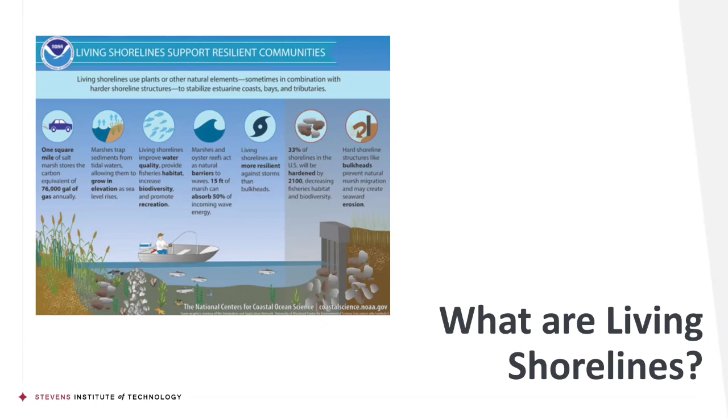So we're trying to take a more broad approach to what living shorelines are. There are a number of other names for living shorelines. You may have heard some of these: eco shorelines, green shorelines, ecologically enhanced, natural and nature-based features. Natural and nature-based features is a term that the Corps of Engineers uses quite a lot now in the United States, so we adopt that and utilize it along with living shoreline. Generally they're all referring to something that has a similar function.

In New Jersey, there is a regulatory definition of a living shoreline. The state defines it as a shoreline management practice that addresses the loss of vegetated shorelines, beaches, and habitat in the littoral zone by providing for the protection, restoration, or enhancement of these habitats. So the primary function of these projects is to utilize or mimic some sort of natural feature, to provide protection or stabilization to shorelines which are eroding.

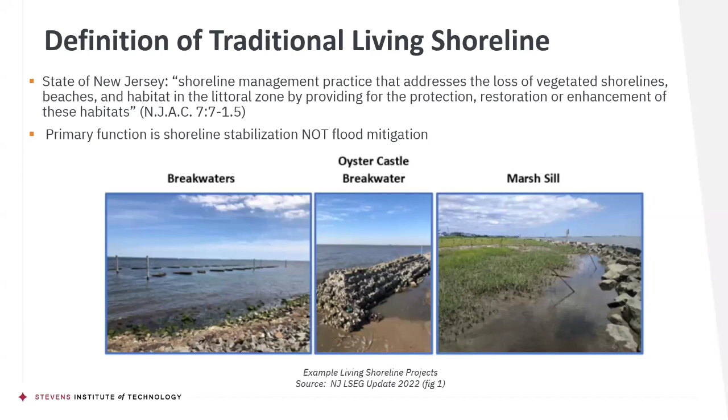And they can be eroding for a variety of reasons. It could be from natural processes like wind-generated waves during coastal storms, but certainly in areas as developed as New York and New Jersey, it could also be eroding from things such as boat wakes, recreational vessels, ferries, even barges that you see up and down the Hudson River. So wherever we have these forces which are creating erosion, one of the techniques we can use to try to stabilize that shoreline is a living shoreline.

We take a very broad definition or approach to what a living shoreline is. We've done at least a little bit of work, but there's still a lot more to be done along the lines of living shorelines on developed coasts. Developed coasts are different from open, natural, pristine coasts in that you're typically space constrained, with development on the landward side abutting up against a water body, which in many cases is used for navigation and commerce in addition to providing habitat. So you have a limited footprint in which you're allowed to work, which restricts the types of approaches you can utilize.

The philosophy we take is that even though you're constrained in the types of approaches you can take, it doesn't mean you can't do the things that serve the man-made function, as well as try to provide or restore some natural function to the shoreline.

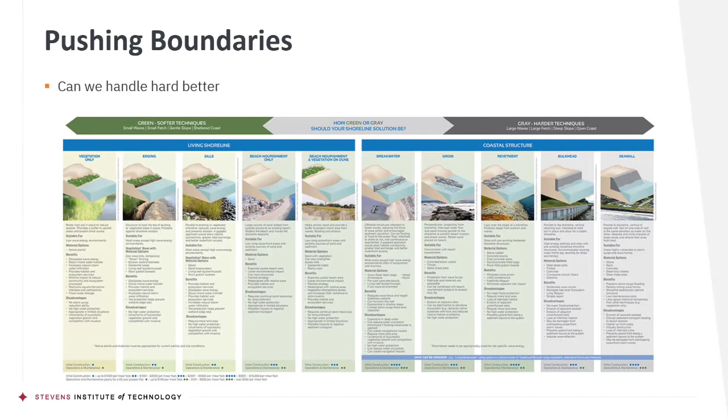What we talk a lot about is how we can push the boundaries and do some of the hard stuff better. As you get to the right-hand side of this chart, are there opportunities to introduce elements which can create more ecological benefit to these traditional hard structures? That's kind of what living shorelines are and how we define them.

We want to walk through some of the history of living shorelines, and this is the Jersey edition, so we're focusing primarily on what's happened in New Jersey. The timeline we're going to cover includes some initial projects, the guidance we've developed, which we'll spend most of our time on, some recently constructed projects, and then the future, leaving time for questions.

In New Jersey, the key early project was the Delaware Estuary Living Shorelines Initiative, a partnership between the Partnership for the Delaware Estuary and Rutgers, where they tried to stabilize the shoreline along the Maurice River in Delaware Bay, on the Delaware Bay shore of the state of New Jersey, on the far southwest side of the state.

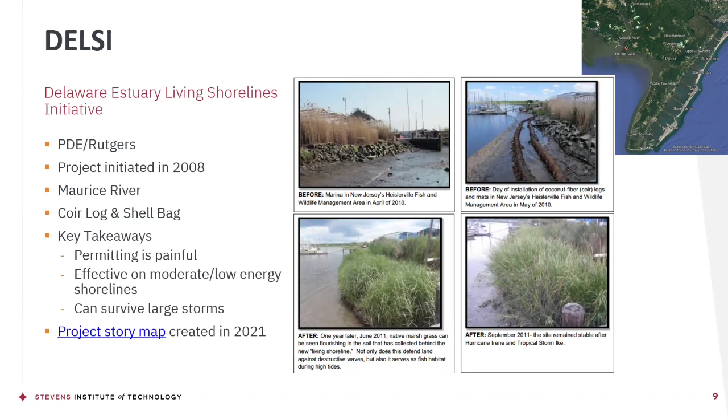This project was really a proof of concept, illustrating how the technique could work in certain environments, but also how difficult it was to permit these projects. The state recognized they spent more money permitting the project than actually constructing it, and started a pathway to make such projects easier to build, recognizing the benefits.

The state did a couple of things. They wrote a white paper in 2009 about living shorelines, which at the time weren't used in New Jersey, though other states like Alabama, Maryland, Virginia, and North Carolina had been using them for quite some time. So the question was, what are these living shoreline things, and could we do them in New Jersey?

They followed that up with a regulatory rule writing workshop in 2010, aimed at providing a regulatory pathway to expedite implementation of these projects. I participated in that workshop, where they brought in experts from around the region to discuss how states successful with living shorelines projects were regulating or permitting them, and tried to roll all that into a rule the state of New Jersey could utilize.

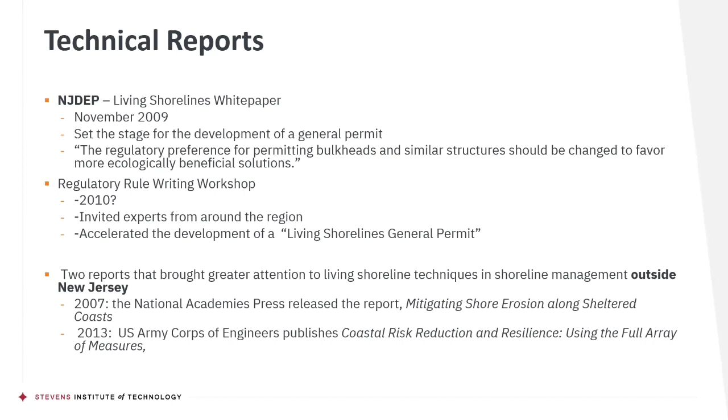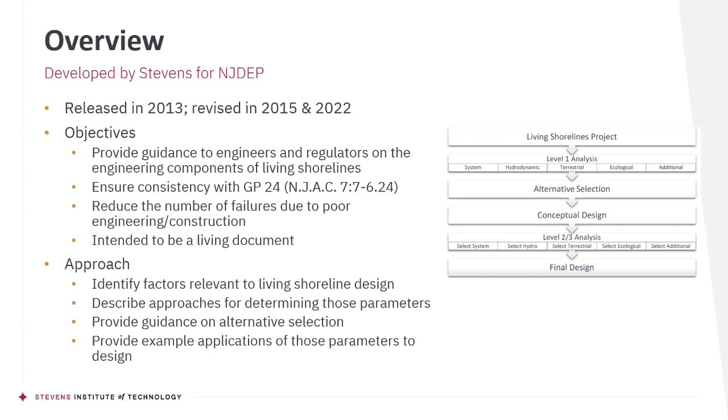The approach we've taken in our most recent revisions is to mimic a document the Corps of Engineers developed called the International Guidelines on Natural and Nature-Based Features. This is a synthesis of experts from around the world getting together and writing, in typical Corps of Engineers fashion, a 1,000-page document about living shorelines, which is very clear and easy to read. We extracted the most relevant things for the state of New Jersey, including this design process, illustrated by this wheel here.

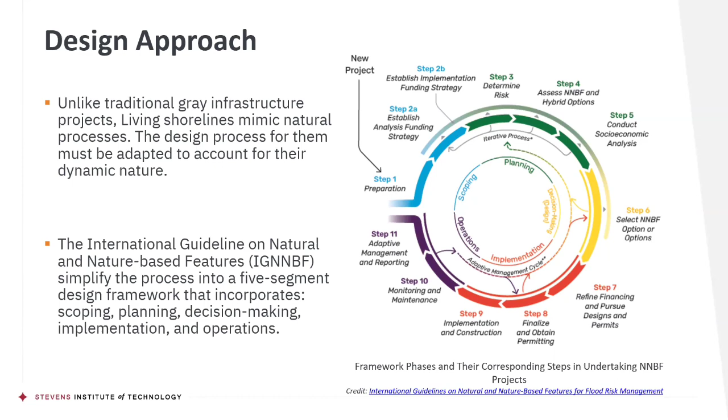It talks about different phases of design: a scoping phase, a planning phase, an implementation phase, and an operations phase, with the level of analysis required at each phase increasing as you walk through.

The scoping phase, as we define it in our guidelines, is a very base level information collecting phase where you're not doing too much work, but trying to obtain information about the site you're working on that will allow you to begin making high level decisions about things you might want to do at a site.

There's a number of tools that have been developed since living shorelines became popularized in the state. Some of them are in this wheel: the Restoration Explorer, the Watch tool. These are things you can implement or apply—many available online—that provide a base level of information about a site, which you can then use to design your project.

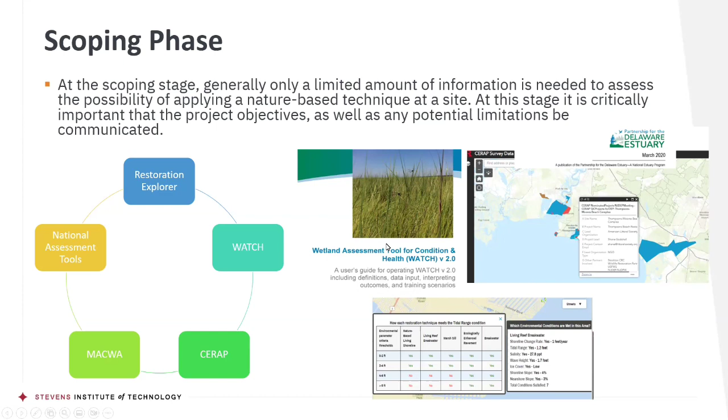The next phase up from scoping is called the planning phase. We envision this as the phase of design where you're continuing to collect information about your site, but now getting more detail, doing a higher level of analysis, providing enough information to create conceptual designs sufficient to approach the state and begin the permitting process for your project.

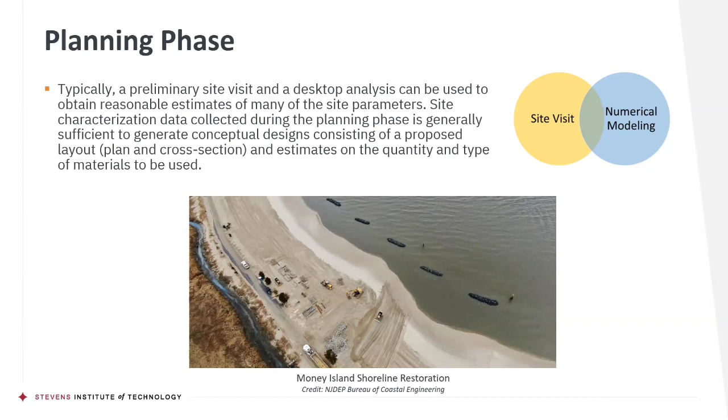Typically, planning phase data collection and design is a desktop type analysis. At this point, it's not necessary to collect field data or do in-depth numerical modeling. It's really about desktop analyses and site visits to get some basic information.

One of the heavy things the document talks about is site characteristics—how we obtain information about our site and then begin to utilize this information to design. We split the characteristics of a site into four categories: ecological, system, hydrodynamic, and terrestrial. We talk about different parameters under each heading relevant to the design of a living shoreline project, how to obtain information about them, and what the levels of analysis refer to.

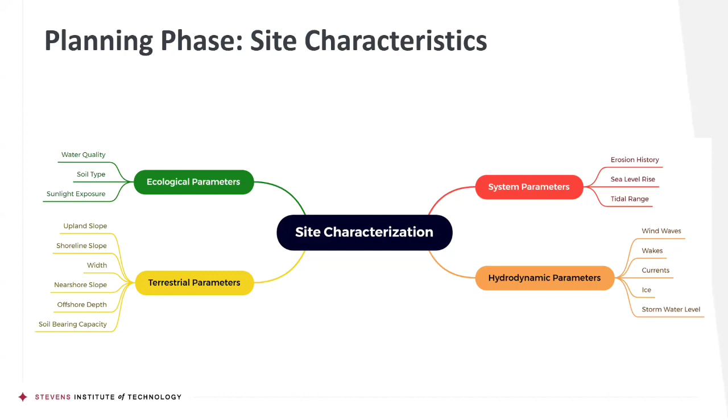So what do you need to collect about erosion history at the scoping level? What do you need to collect at the planning level? And what do you need to collect at the implementation phase, which is the next highest phase?

As part of our document, we were asked to provide guidance on what types of projects might be appropriate in different environments. So we collected information about originally five different types of projects, but now in our new guidance, only three: a marsh sill, a breakwater, and a living reef.

For each of those site characteristics you see on the left-hand side of our table, we talk about the types of conditions under which each of the three different living shoreline project types are appropriate.

We provide a qualitative estimate on the left table, and then on the right, we have quantitative numbers. You may wonder why we didn't just combine the two together, because we could have.

The reason we didn't provide numbers in our table originally was because everything within this table isn't necessarily black and white or hard cutoffs—there's a lot of gray area with these parameters. So to emphasize that, we split out the qualitative and quantitative, forcing somebody to think as they went back and forth between the two tables, and hopefully recognize that if your erosion was slightly above one threshold versus another, you could probably apply more than one project type.

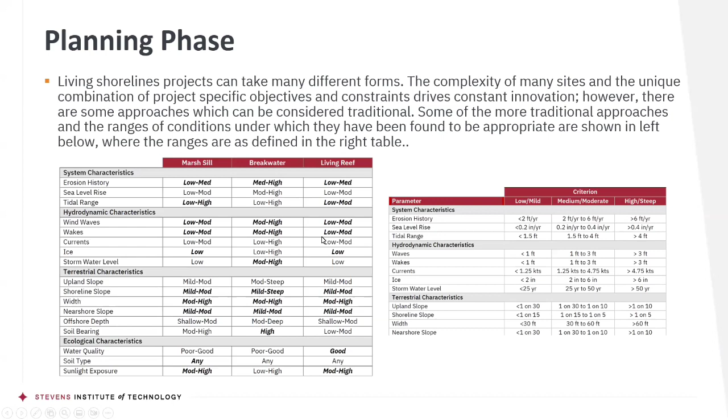Finally, the implementation phase is really the level of analysis when you begin to take your conceptual designs and turn them into what I'll call real engineering scale workable designs. So this is the fine tuning that you would do in your analysis.

At the implementation phase, it's not recommended that you go back to, if we're counting, there's 17 different parameters that we talk about. It's not recommended necessarily that you go to a higher level of analysis for all 17 of those parameters. But if you reference back to the table on the previous slide, those bold and italicized parameters are the ones that are most relevant for specific project types. Those are the ones you would dig in on and do a higher level of analysis.

And that higher level of analysis could be anything from advanced numerical modeling to field data collection. These are the types of big ticket items that cost a lot of money, cost a lot of time, but it's the type of information that you want to be certain of to ensure that your design is going to perform as you intend.

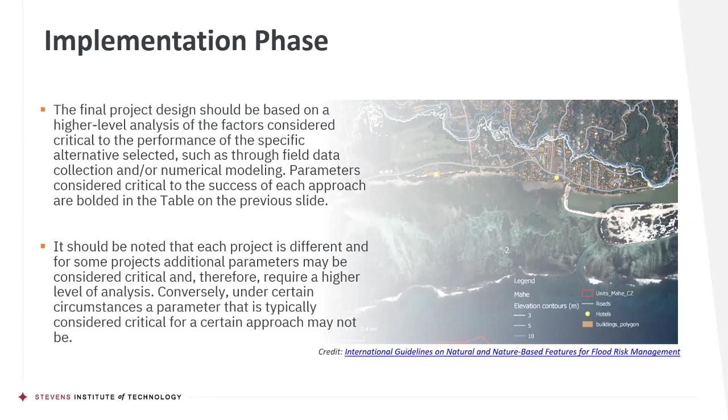So the different categories of parameters, just to go through them: system parameters. System parameters are generally more regional type things, or parameters which, like erosion history, is a parameter which is really not in and of itself a characteristic. It's really a response of the shoreline to other parameters. So because it's this accumulative kind of effect, we call it a system parameter.

And so we have three of them: erosion history, sea level rise, and tidal range. And again, in the Living Shorelines Guidelines document, we go through each of these in detail, and we talk about how we determine information about these parameters and how we apply it to the design of a living shoreline. Some of it's very straightforward for engineers, maybe, but then some of it's a little bit different.

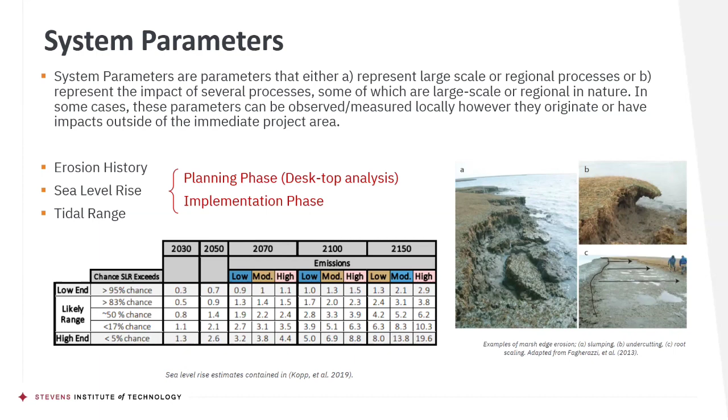So when we talk about things like tidal range, traditionally in engineering we talk about geodetic datums, NAVD 88 and NGVD 29. When we talk about living things, we tend to talk more about local tidal datums, so local mean high water and local mean low water, because these living aspects of the projects, the vegetation and the biota that are using the project, are dramatically affected by small changes in tidal range. So a more regional understanding of tidal range is not necessarily appropriate when you get to the design of living shorelines. We talk about the different interpretations required for living shorelines projects.

For the hydrodynamic parameters, we have five: wind waves, boat wakes, currents, ice, and stormwater level.

A couple of things that are maybe more relevant for these living shorelines: boat wakes, again, in the urban waterways around New York and New Jersey. Boating, recreational and commercial, is a significant source of energy within our waterways. So understanding boat wakes is really important.

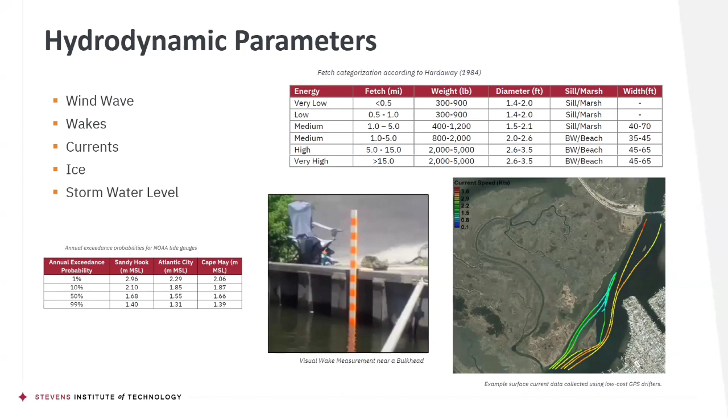Stormwater level is important. Understanding that if we're designing a project to protect a marsh, if the entire marsh is inundated, we may not need to protect it because it's underwater, so the edge won't erode. So it's a little bit of a different, nuanced understanding of how to apply definitions of storms and stormwater levels to the design of living shorelines.

Moving up the scale now, we're moving into terrestrial parameters. Living shorelines have a variety of terrestrial parameters. Slope is really important for living shorelines.

And then things like soil bearing capacity. Most of the locations where we're building living shorelines, at least in the more pristine environments, the soil sediment is very loose, so we have to worry about projects - things made out of rocks and other structures - sinking.

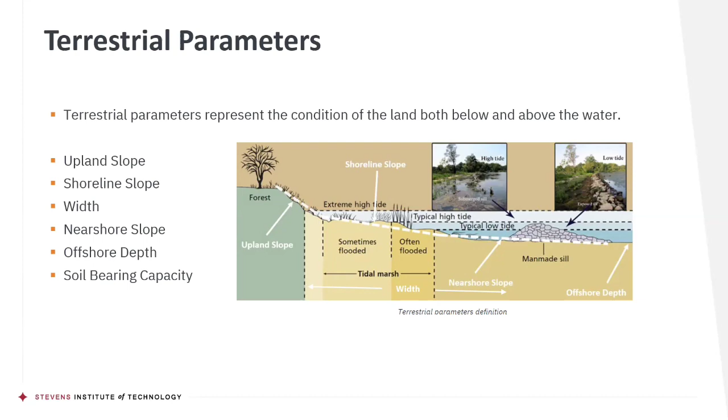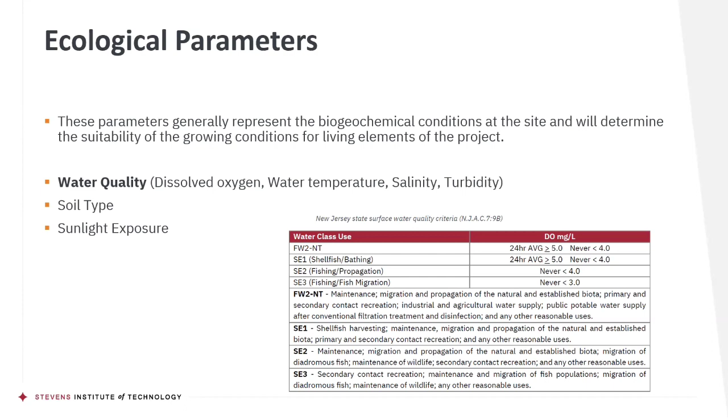Ecological parameters are things that affect growing typically - water quality, soil type, sunlight exposure. These are the processes that affect the biology really.

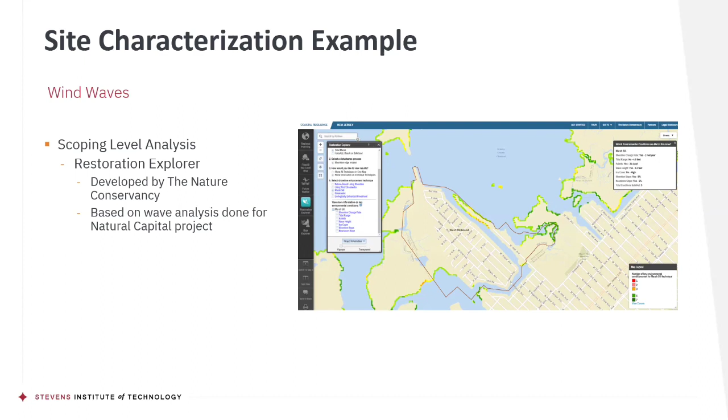As an example of site characterization for wind waves, this is a low-level scoping analysis. There's a tool called Restoration Explorer developed by the Nature Conservancy, which allows us to point and click, using built-in GIS databases to give us an assessment of 6 of the 15 parameters at a quick glance. Downside is not all of the parameters are necessarily very accurate. You always want to follow this up with more detailed analysis, but at a high level, it gives us a quick estimation of the characteristics of the site.

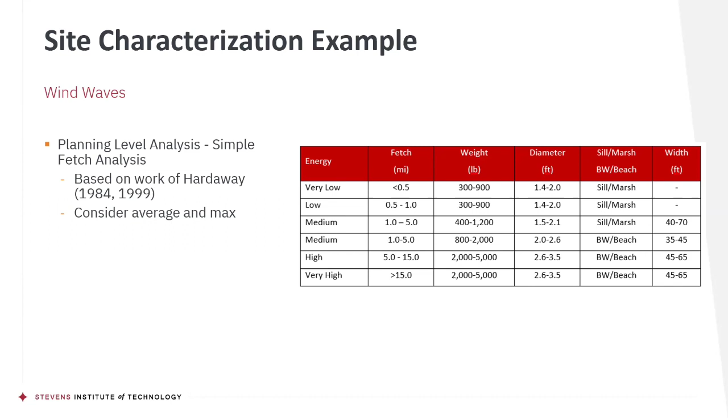For wind waves, we can go to the next level, the planning level, where we look at fetches, or distances over which the wind blows. There are some tables which relate the characteristics of a project to a single parameter, the fetch. This requires a little bit higher level of analysis - you actually have to measure your fetches, but it's still not terribly difficult.

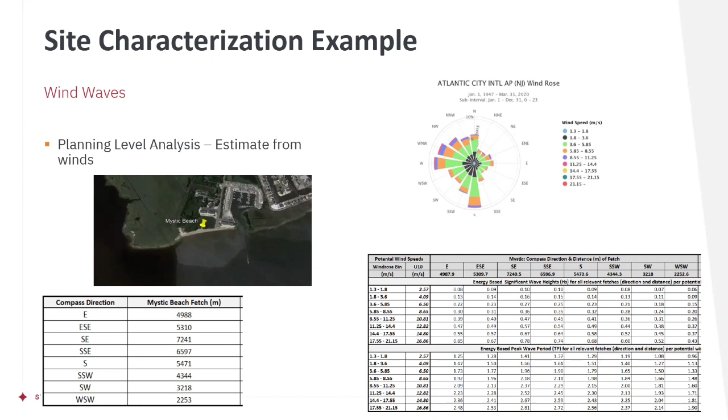Escalating to the next level, you might want to take estimates of the wind and do some calculations. So instead of just taking a single distance measurement and going to a table, you can calculate your wave heights yourself. You're escalating the level of effort required, but also the level of confidence you have in the parameters.

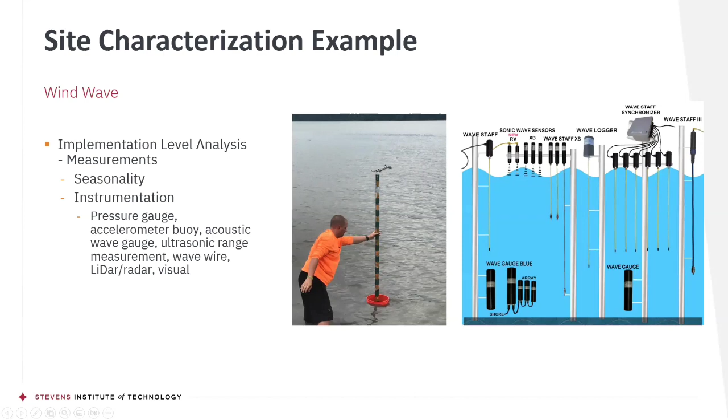If you move past the planning level phase to something more active, where you put in significantly more effort, the implementation level analysis, you can go out and actually measure waves yourself. There's a variety of different techniques and instruments you can use, everything from low tech instruments like a graduated staff, to pressure gauges and capacitance gauges and all sorts of high-tech measurement techniques.

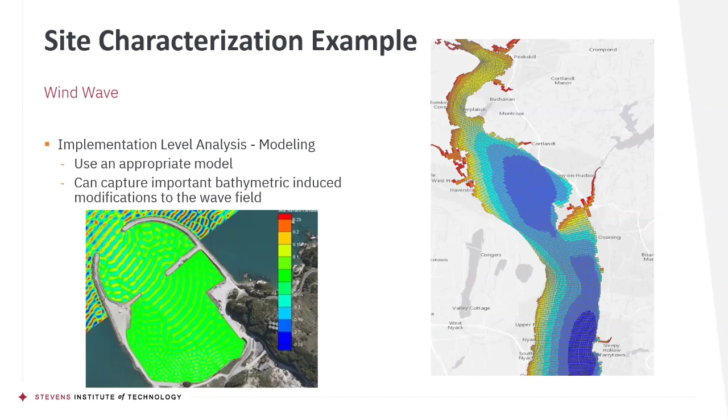If you're working at a site with a very high budget, you can actually model the wind waves. There's a variety of different models appropriate for different situations, and you can select an appropriate numerical model, hopefully calibrated and validated, which will probably give you the best amount of information about your site. But this starts to get very expensive in terms of both time and money, so it's not something you would do for many projects - only for select projects.

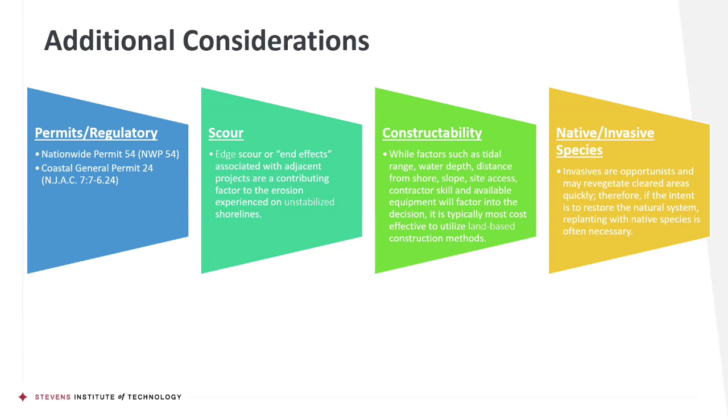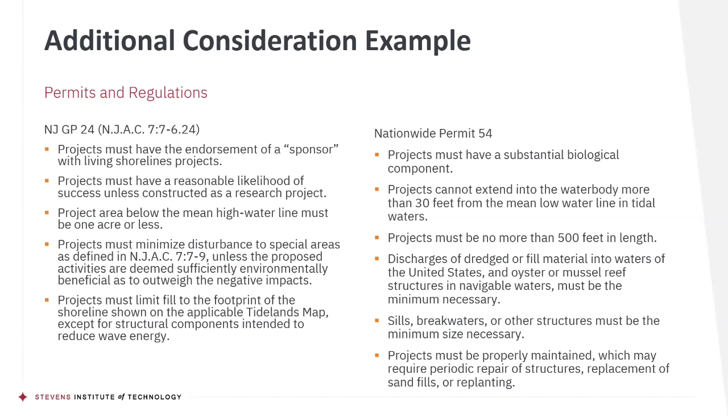There are additional considerations like permits, scour, constructability, native and invasive species, debris impact, project monitoring, adaptive management, and beneficial reuse, all of which influence the projects you can build. Here's an example of how we talk about permits and regulations, breaking down the general permit from New Jersey and the nationwide permit from the Corps of Engineers. These are the other things we discuss in the guidance document for constructing living shorelines.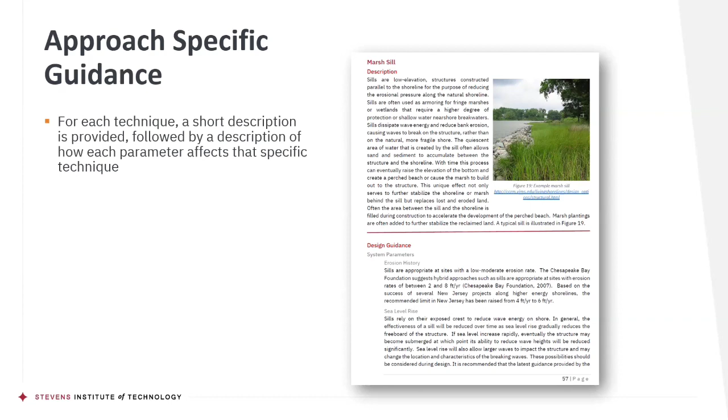Ultimately, we wrap all of that into a discussion for specific projects. Here's an example of our discussion for Marsh Sill, where we talk about how to apply the erosion history, how to apply the wave height, and how to apply the storm surge to the design of a Marsh Sill project.

As part of that, we also identified some remaining knowledge gaps - gaps in the science, assessment, design and regulatory aspects. This was done at the request of DEP to help guide future funding announcements. We're still continuing to work, as this is a living document, so we're planning to update it to look at aspects like what defines a simple project, where you might not need a high level of engineering analysis.

Right now, we don't have much in the way of equation-specific guidance. We rely on engineers to apply their own judgment, or to apply existing equations that are out there. We're talking about incorporating more of that hardcore engineering, more cookbook type guidance, into our future work.

So that's the update to our original guidance, and those were the original types of projects we were talking about. But we realized they were all really based in more natural, pristine environments, so the types of projects were relatively limited.

We got more involved with groups looking along developed shorelines, saying, this is all great, these living shorelines are great, we like the philosophy of living shorelines, but how do we apply them in more developed environments? Having had the privilege to work with a number of groups, including folks in Hong Kong and other places even more space constrained than we are, we started to get really interested in developed shorelines. The state of New Jersey has also become interested because we have so many urban water bodies - how can we apply these principles in space constrained areas? So we developed a sister document related to developed shorelines.

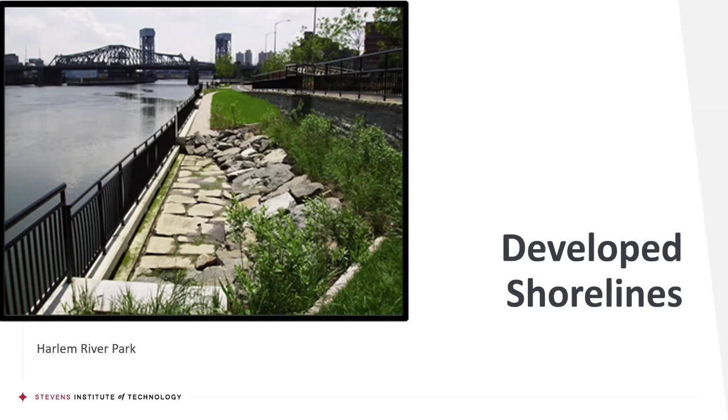This just kind of outlines some of the need, but basically in this area specifically, we are very much in need of this type of guidance. So what we did is we took a bit of a different approach. We queried the existing guidance that's out there. It turns out that there's very sparse information related to developed shorelines.

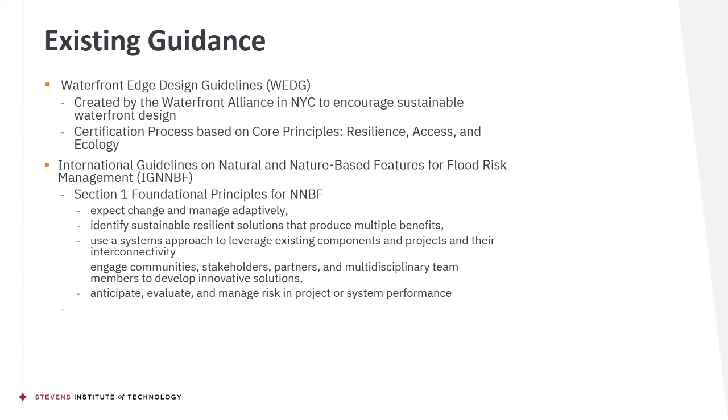Two valuable resource documents are the Waterfront Edge Design Guidelines created by the Waterfront Alliance in New York City—it's kind of a LEED rating criteria almost for shorefront design—and the International Guidelines on Natural and Nature-Based Features, both of which have aspects relevant more so towards developed shorelines. So we used that as inspiration to come up with this sister document.

This Eco Shorelines and Developed Coast Guidance and Best Practices document, which was also released in August of '22 for DEP and is available on their website. Through that document, we came up with essentially 3 guiding principles and then 6 design elements.

The guiding principles are core to the philosophy of developing sustainable, resilient shorelines. They provide, at a higher level, the principles that should be applied on pretty much every living shoreline project along developed coastlines. Those are: maintain and restore natural areas, monitor and assess the projects, and design for resilience and adaptability.

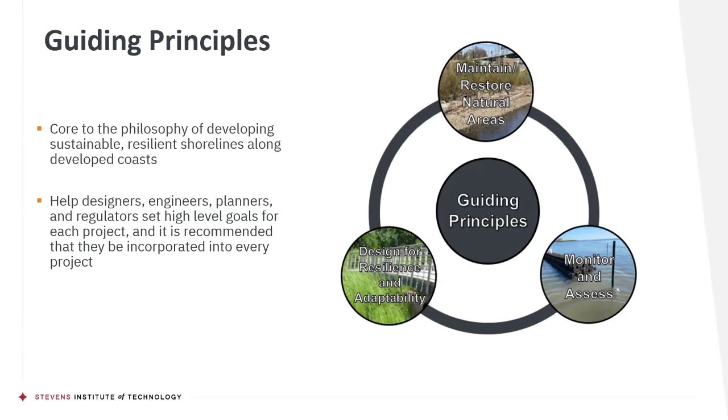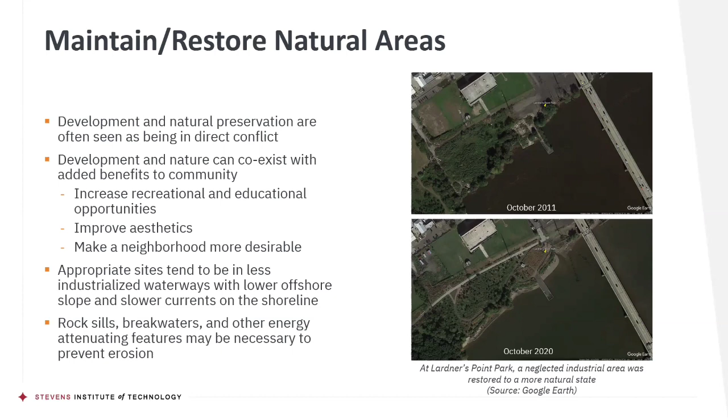I'll go through this quickly. The idea of maintaining and restoring natural areas is that the highest level you can do is, if there's an existing natural area, don't disturb it in the first place, because it's already probably got the best ecological function you can get in its natural state. If it doesn't exist, or used to exist, can you bring it back to that state? Often, to bring it back, it might require some structures to assist, given that these environments, being in developed areas, are no longer natural. So we often have to provide assistance.

Designing for resilience and adaptability—resilience kind of stands alone. We want to make sure projects are able to withstand the test of time, able to accommodate things like climate change and sea level rise. Adaptability is the idea of building projects that have the ability to adjust to changing conditions. We talk about sea level rise and whether we'll get a high, moderate, or low sea level rise scenario. Adaptability is a way of not over-designing in the present, to account for these future uncertainties—leaving room to adjust our designs as we move forward.

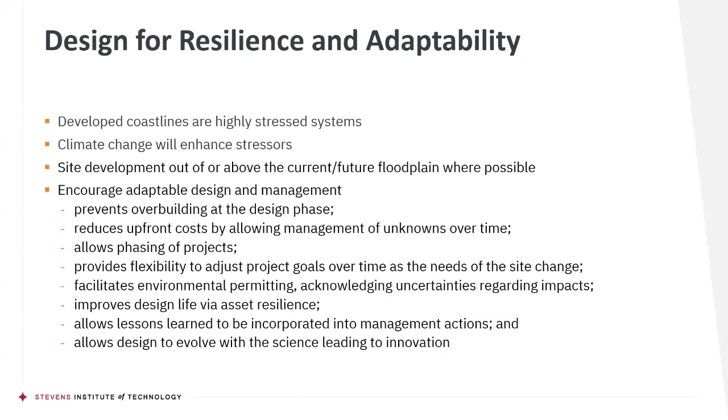Monitoring and assessing means basically whatever we build, we should be monitoring and assessing it to see whether it's working. If we're going to have adaptable designs, we need the monitoring data to know how we should adapt it. But the assessment is also important for guiding future investments of money. So if we're going to do these ecological enhancements of shorelines, we need the data to support and back up the fact that they are successful and useful.

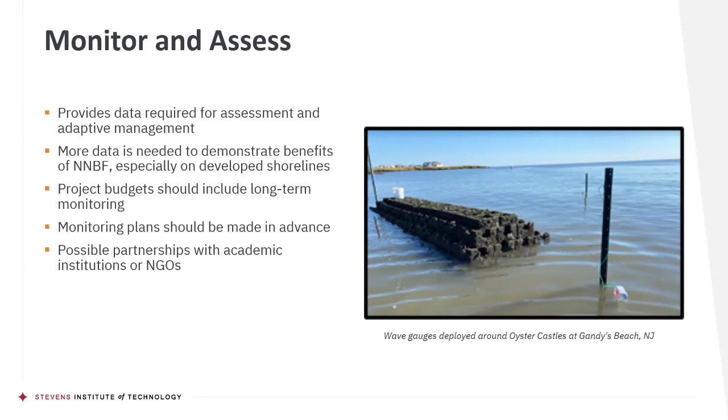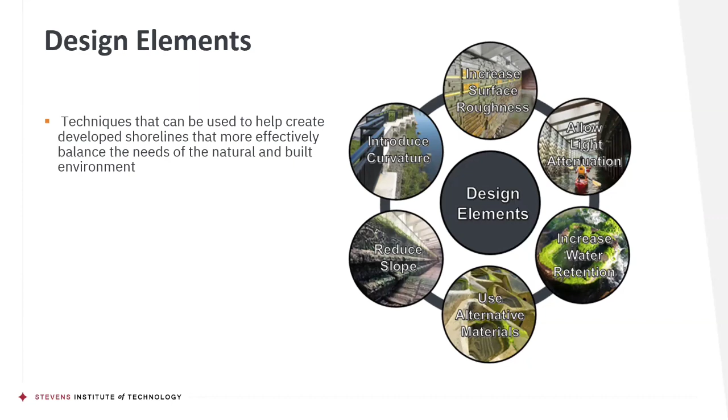Moving on to the design elements. Whereas the guiding principles are bigger-picture, philosophical things that apply to each project, design elements are more specific—aspects we can build into projects that will help them function better from an ecological standpoint. These aren't necessarily things you'd apply at every project, but would really apply only where your specific location or situation suggests they might be appropriate.

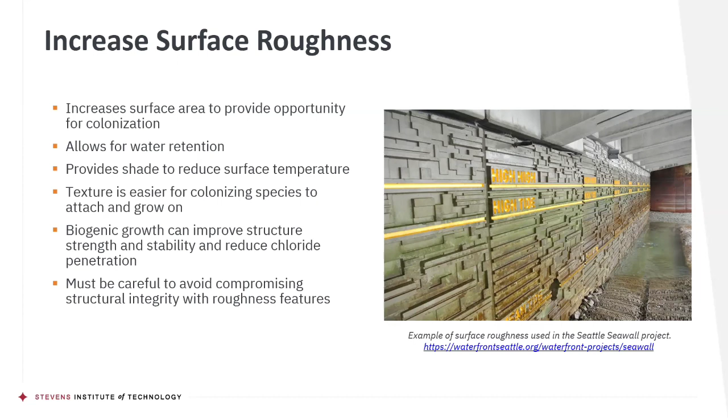Walking through some of these: increased surface roughness. We tend to like smooth steel sheet pile, bulkheads, or even concrete walls—they look very attractive, but they're not attractive for organisms to colonize. By incorporating surface roughness, you create micro habitat niches, preserve some water in these environments, and create surfaces for organisms to attach to. So increasing surface roughness generally increases the attractiveness of the structure to colonization by organisms.

Allowing light penetration—this picture here is one of my favorites. It's the Seattle seawall in Washington State, where kayakers are paddling under translucent panels, which allow light penetration into the water column.

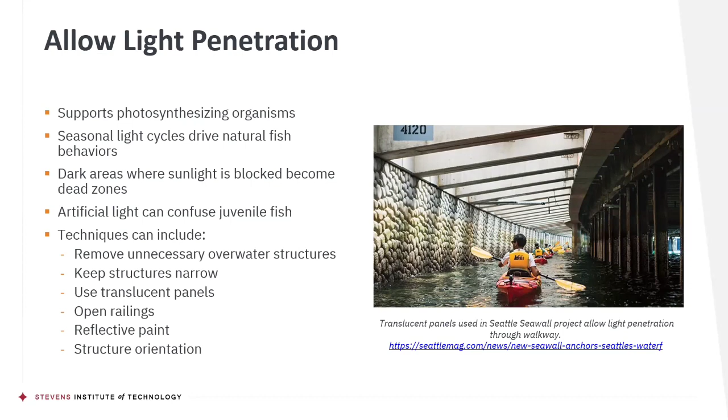Light penetration is important for photosynthesis of organisms and vegetation in the water column, but also for the behaviors of certain fish. Certain behaviors - feeding, mating, et cetera - are only carried out under either light or dark conditions. If you shade the water, you basically remove the ability of the organisms to carry out that behavior. So light penetration can be important.

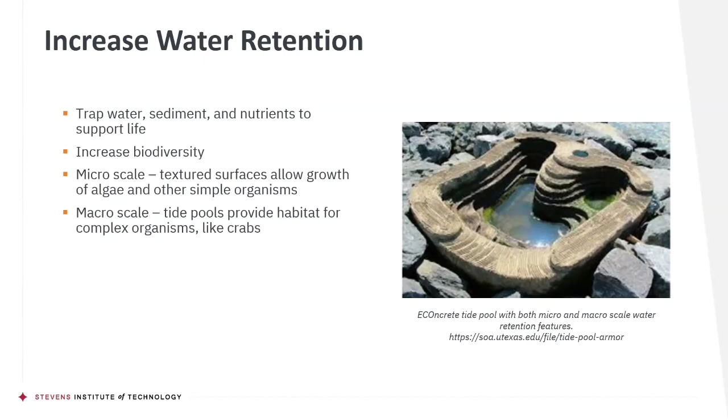Increasing water retention is related to surface roughness but slightly different - creating either macro scale or micro scale water retention features. What you see here is a tide pool created by a company called ECOncrete. It's a cast concrete form embedded within an existing rock seawall for the purpose of retaining water. Retaining that water provides habitat for different organisms - some crabs like this habitat, and crabs, algae, and things like that tend to enjoy the water retention.

Looking at alternative materials - we do a bit with different types of concrete for structural capacity here at Stevens, but you could also design your concrete mixes to be more amenable to organisms. Your concrete is leaching out chemicals when it's curing and sitting in the water, so if you design certain additives into the concrete, it slows that leaching and makes the surface more attractive to growth. Here again is an example from ECOncrete where you have a traditional marine mattress made of normal concrete on the left and an eco-enhanced concrete on the right. You can see the algae attaching itself to that ecologically enhanced concrete. So you can design the concrete to make it more attractive to algae, oysters, whatever you want.

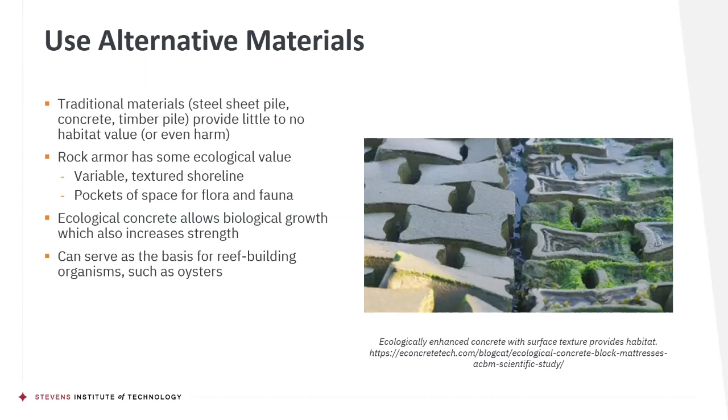Reducing slopes - almost all developed shorelines are vertical, again by that balance between needing to accommodate development on the landward side and commerce on the waterward side. But if you can create an artificial slope by incorporating things like these - what we call habitat benches - this is the Seattle seawall. It provides a faux habitat for fish and other organisms to utilize.

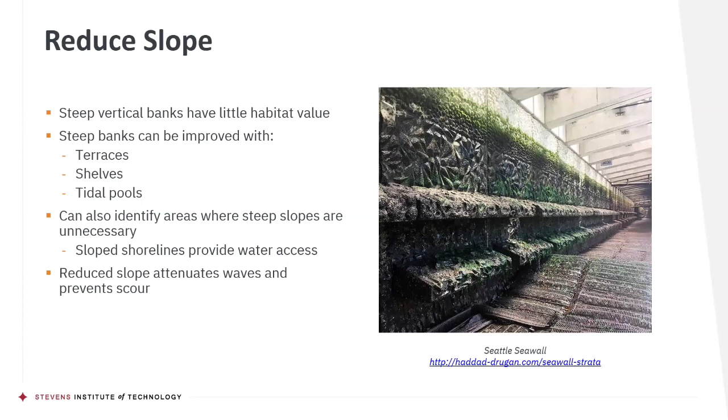Introducing curvature - most man-made shorelines are straight, and navigation channels are straight. Here's an example at the Harlem River where by utilizing a small amount of land for landscaping, they were able to create an artificially curving shoreline. If you look at the pilings out in the water, the pilings are straight, so the shoreline is in fact straight. But that little bit of curvature creates a micro niche habitat where juvenile fish can hang out and avoid the strong currents of the river and avoid predation.

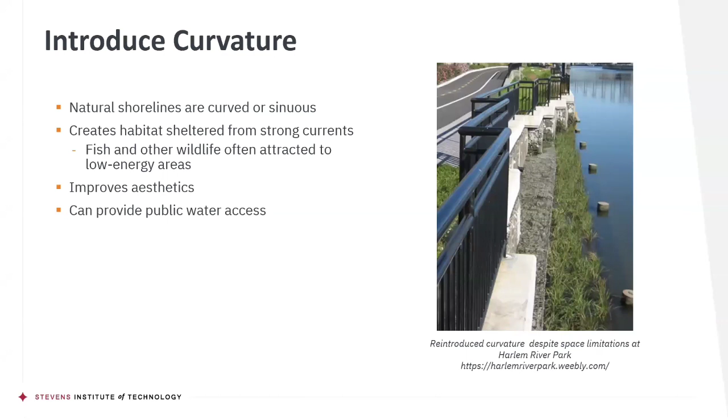Just a couple quick examples of projects in New Jersey. There's a site we're working on in Forked River Beach, New Jersey, down by Long Beach Island. They're utilizing a thing called a HESCO basket, which is sort of like a gabion - a wire mesh enclosed with a combination of rock and seashell. The shell is utilized because the natural shellfish in the area are more likely to attach themselves to shell than to rock. So the idea is hopefully this eventually becomes encased by natural shell. In the meantime, it's providing wave attenuation and protection of the shoreline behind it, reducing the erosional pressure on the shoreline.

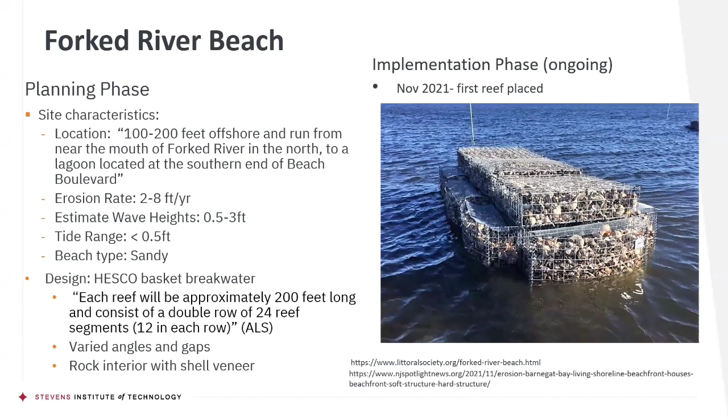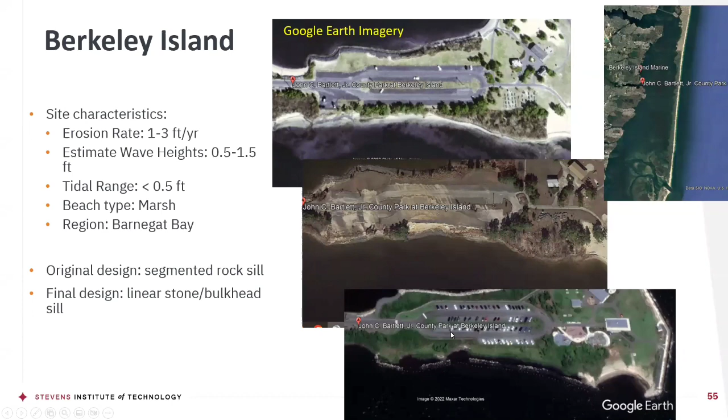After Hurricane Sandy, this was not a successful project. So this is an important project that we are monitoring, because we can figure out why it wasn't successful. One of our PhD students, Amy Bredis, who helped create this presentation, is working on this project, trying to understand why it wasn't successful, so we don't repeat that mistake in other places.

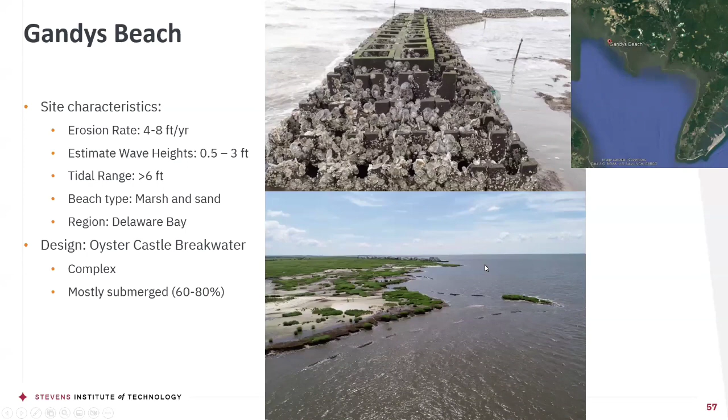Moving on to the future, I wanted to spend a couple minutes talking about what the future looks like, and then we'll have time for questions. Climate change is the big unknown out there. Sea level rise for us is the key one, because it influences the waves and water levels at all of our shoreline locations.

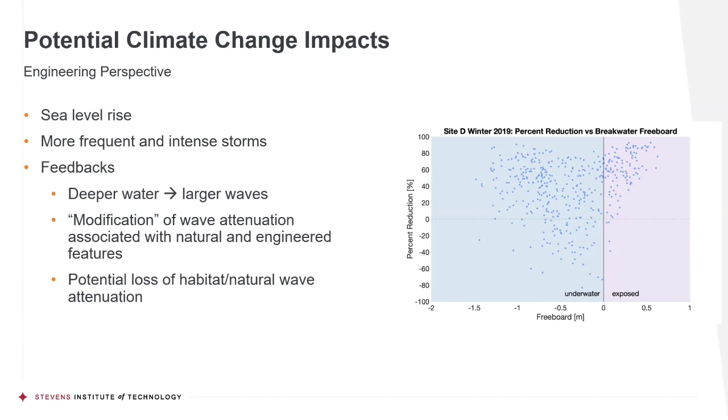This data, which I don't expect you to interpret with very few minutes left late in the afternoon on Tuesday, is from Gandys Beach, the previous slide. What we're finding is that some of the structures we build to protect the shoreline from waves may actually be amplifying the waves. This particularly happens when the structures are submerged. With climate change and sea level rise, structures are more likely to be submerged more frequently in the future. So what does that mean for the future?

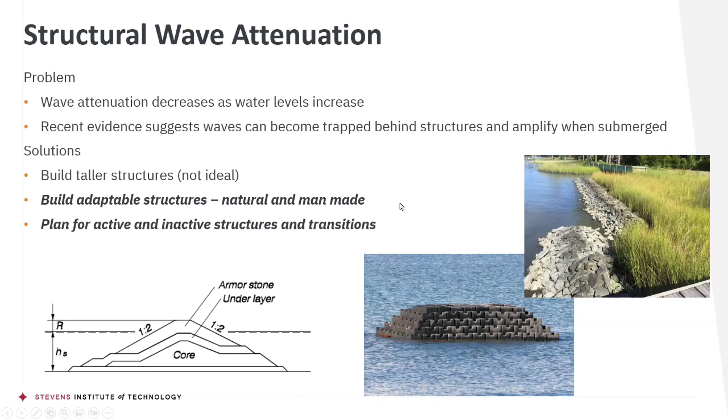I'm going to go through this pretty quick since I want to leave time for questions, and I only have a couple more slides. The idea is that we want to think about how we can build structures smarter. Not necessarily taller, but how can we build them wider, maybe more naturally, providing opportunities for adapting as sea level rises. This platform is a great example. If you build a platform like that, there's plenty of room to build on top, so if sea level rises, you can maintain its function.

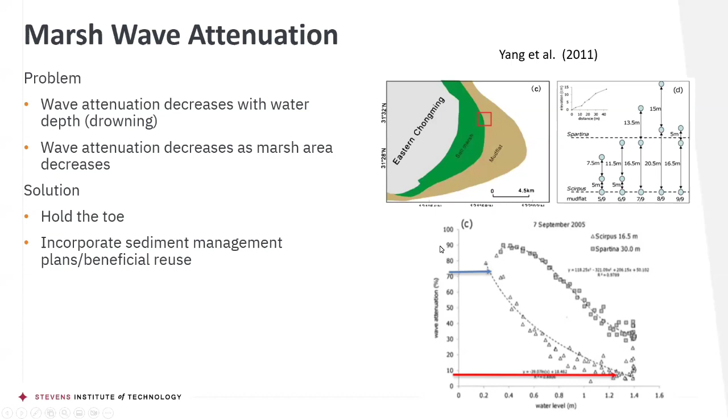Again, probably too much detail for a Tuesday night, but the gist is that as marshes become inundated, they lose their ability to attenuate waves. So we need to figure out how to protect these marshes over time. Same thing with storm surge — if marshes drown from sea level rise, they lose their ability to attenuate waves.

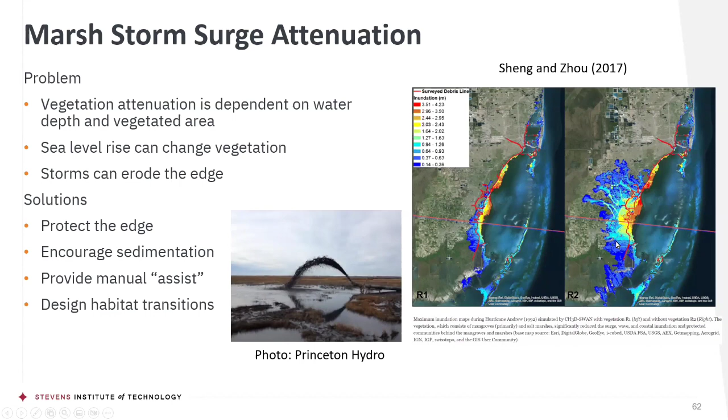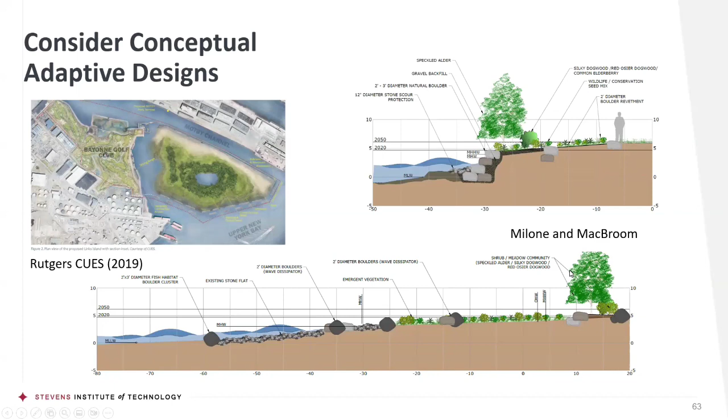As the marshes become drowned, we start to think about things like conceptual adaptive design. How can we build in transitions? How can we build things today that may serve a certain purpose? The picture on the bottom shows: can we build structures that might serve as breakwaters today, out in the water? There may be some structure on land that's dry today but may become submerged in the future and serve the function the breakwater serves now. So how can we design these structures to provide multiple purposes at different points throughout their lifetime, appropriate for the given conditions? This isn't trivial, but it's some of what we're beginning to think about.

And with that, I will stop and ask for any questions.

All right, that was extremely informative. Thanks, John.